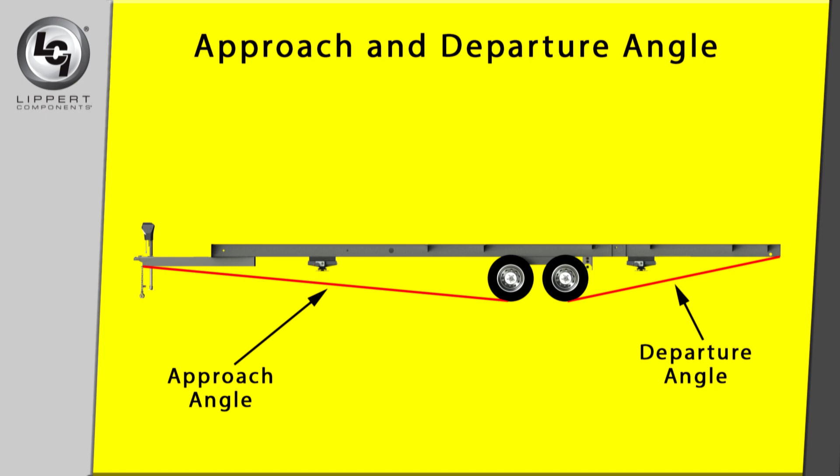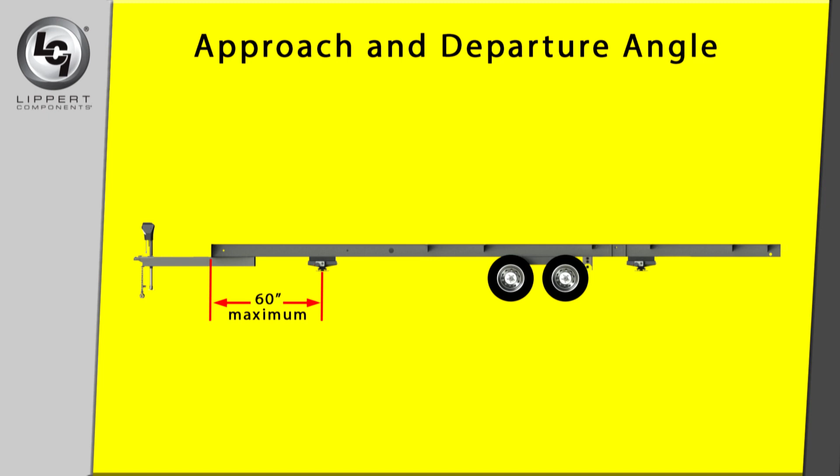Next, measure from the front of the frame and make a mark at 60 inches. This will be the maximum allowable distance for the location of the center of the C-jack footpad. The final location should be as close to the drawbar as possible, staying within the approach angle.

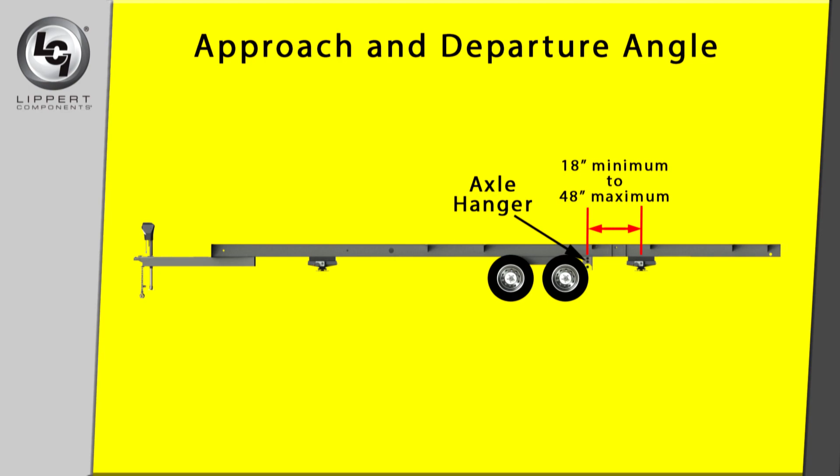Now, measure from the center of the rear axle hanger to the center of the rear C-jack footpad. The minimum allowable distance is 18 inches, and the maximum is 48 inches, while staying within the departure angle.

The trailer must be supported per manufacturer specifications before working underneath the trailer. Failure to do so may result in death or serious injury.

Please note that this bracing system is to be mounted across the frame, roadside to curbside, and the jacks are to be installed roadside to curbside as well.

Before beginning, ensure that all wires and hoses are clear from the path going from the curbside I-beam mounting bracket to the roadside I-beam bracket before starting the installation.

First, measure the I-beam mounting bracket and make a mark at the center. This will be the center for the C-jack footpad.

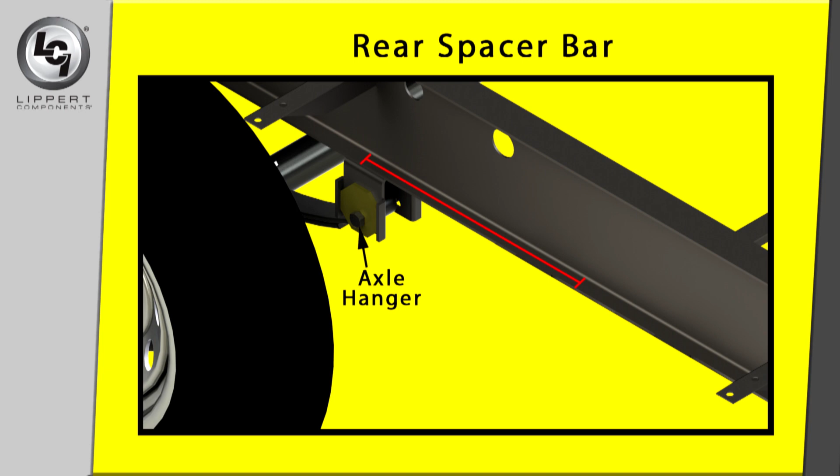Now measure from the center of the rear axle hanger and make a mark on the I-beam at 18 inches and at 48 inches. This is the minimum and maximum mounting distance.

Next, align the center of the I-beam mounting bracket between the 18-inch and 48-inch marks, staying within the departure angle. Make sure that the bracket lip is flush with the outside lip of the I-beam.

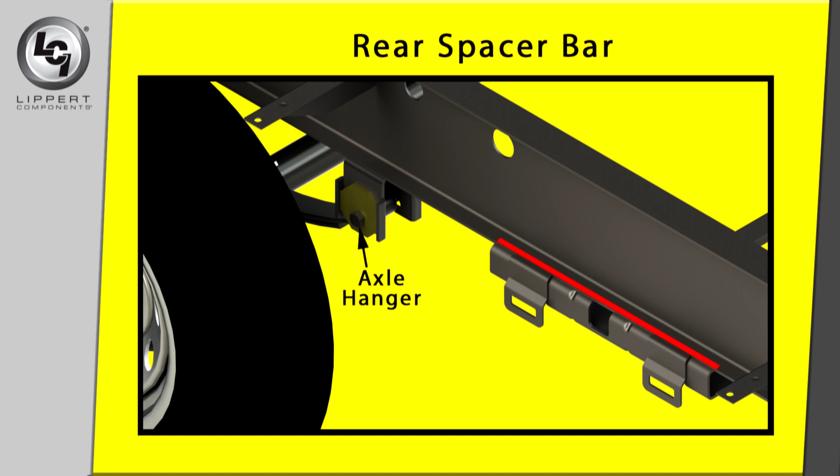You will need to use clamps to hold the I-beam mounting bracket to the frame rail. Then mark the 4 holes on the lip of the I-beam with the spaces provided on the bracket.

Use the notches on the I-beam mounting bracket to locate the center point. Please note, the center point is dependent on the width of the frame. The hole needs to be drilled between the 2 notches on the I-beam mounting bracket.

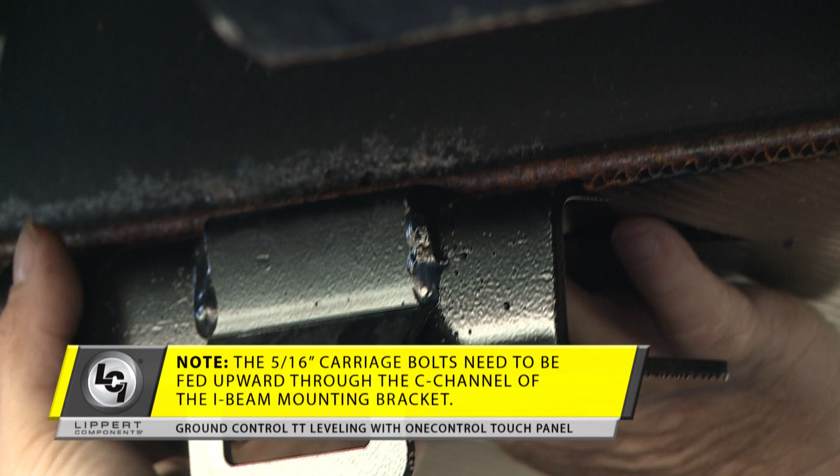Drill a hole into the frame as marked for all carriage bolts. Now, fasten the I-beam mounting bracket to the I-beam frame with 4 5/16 inch carriage bolts.

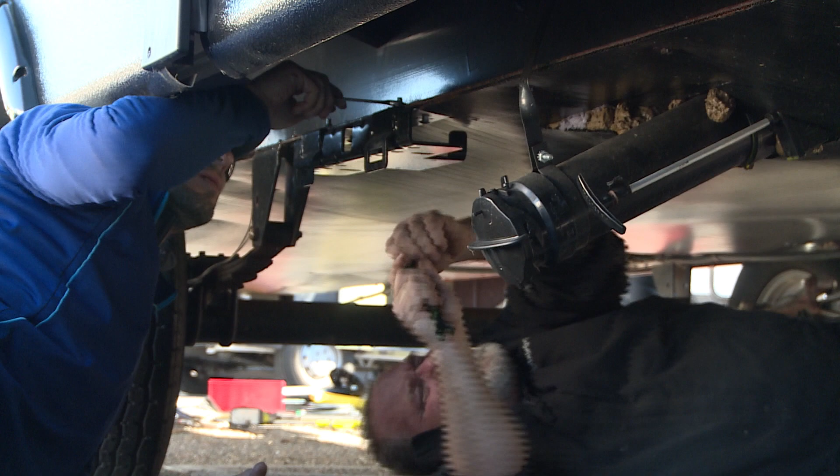Secure the carriage bolts with 5/16 inch serrated flange nuts and torque to 13 foot-pounds. Repeat these same steps on the opposite side of the frame.

Once both mounting brackets are in place in the rear of the trailer, align the tabs provided on the I-beam mounting bracket with the slotted holes on the spacer bracket.

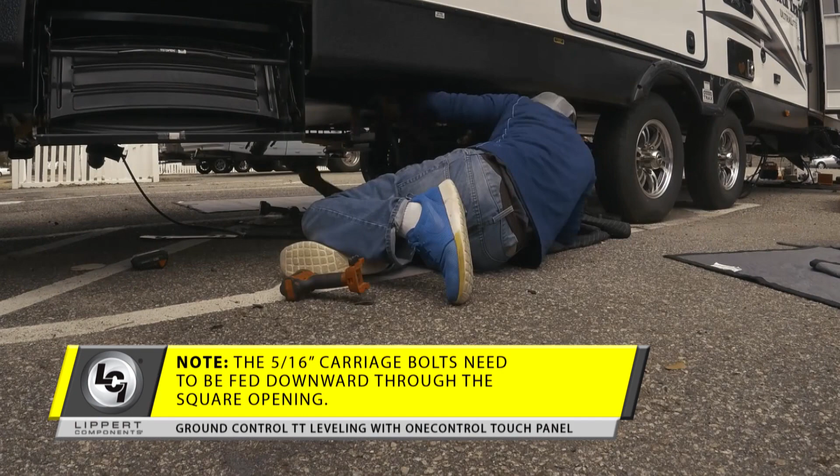Fasten the I-beam mounting bracket to the spacer bracket with 5/16 inch carriage bolts. Secure the carriage bolts with 5/16 inch serrated flange nuts and torque to 13 foot-pounds. Repeat these steps on the opposite side of the frame.

Before inserting the center tube, if there is no mark or hole for the center location on the center tube, measure and mark the center location.

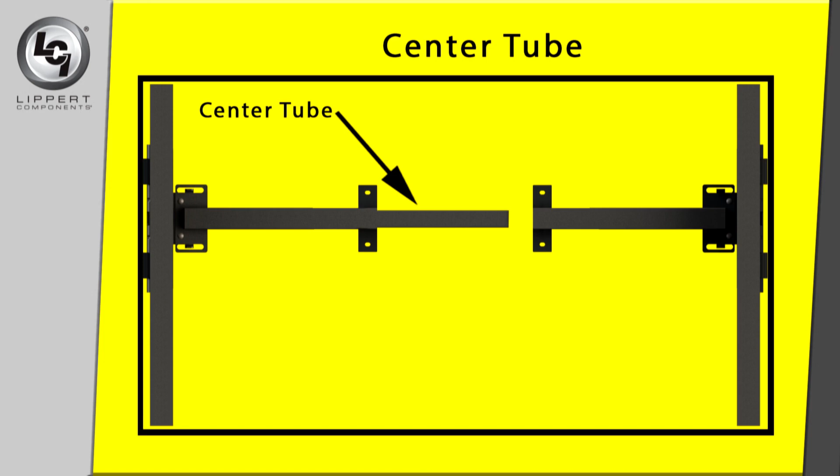Next, insert the center tube into one of the spacer brackets and slide it one way until the other end is clear to insert into the spacer brackets on the opposite side. Ensure that the center hole or mark is facing downward on the center tube.

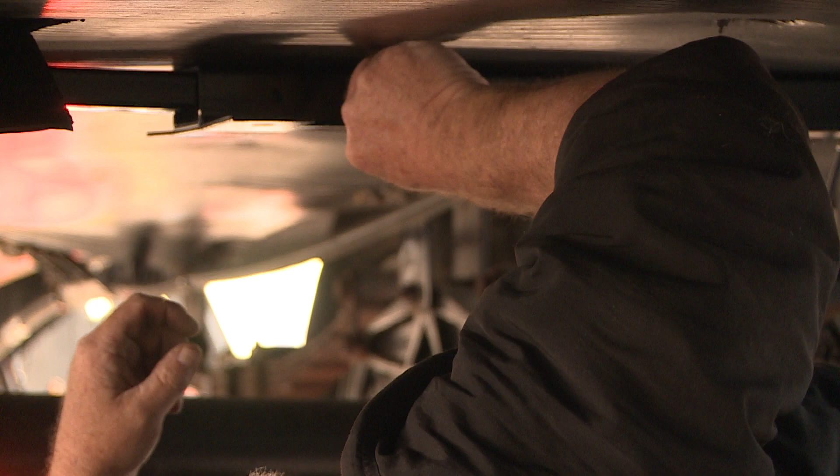Use the hole to center the tube between both ends of the I-beam mounting brackets. Using the 8 marked holes on the spacer brackets, mark holes to be drilled on the center tube.

Drill the 8 marked holes on the center tube with a 3/8 inch drill bit. If desired, you can remove the center tube from the spacer brackets before drilling.

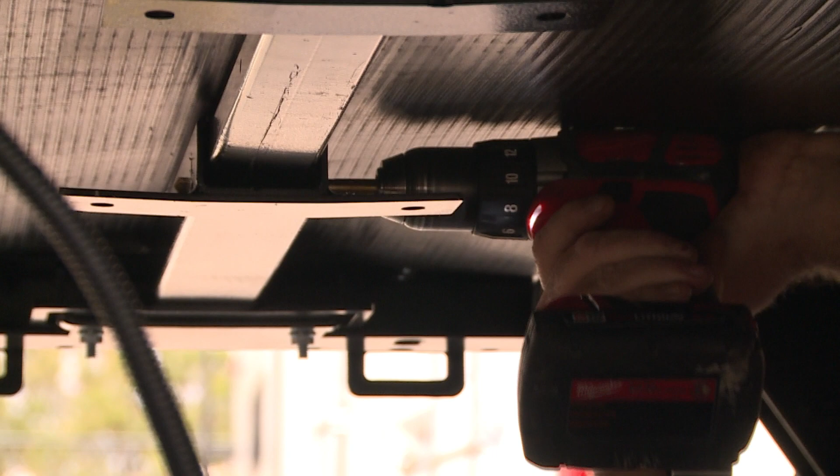Now insert 4 3/8 inch hex cap screw bolts with 3/8 inch washers through the spacer bracket and center tube. Secure them with a 3/8 inch flange nut. Torque each to 13 foot-pounds.

First, measure the I-beam mounting bracket and make a mark at the center. This will be the center of the C-jack footpad. Now measure from the front of the frame and make a mark at 60 inches. This will be the maximum allowable distance for the location of the center of the C-jack footpad.

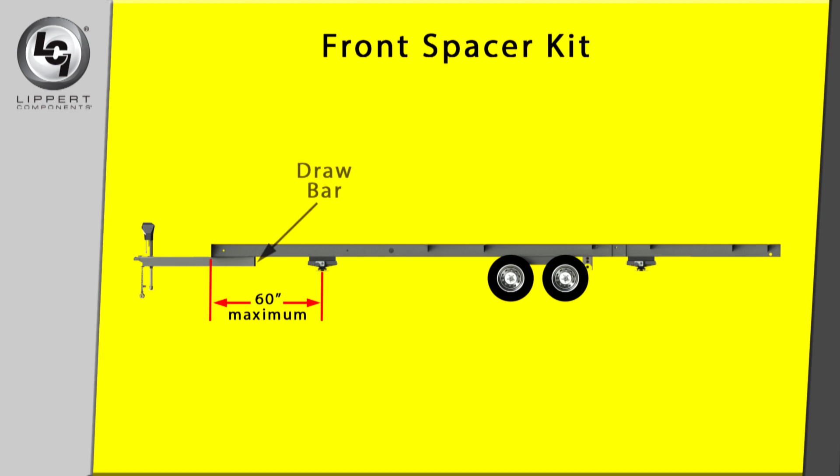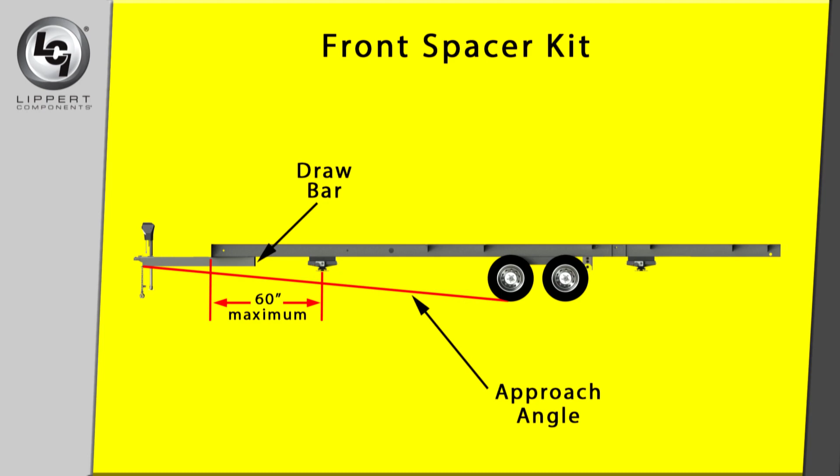The final location should be as close to the drawbar as possible, staying within the approach angle. Make sure that the bracket lip is flush with the outside lip of the I-beam. You will need to use clamps to hold the I-beam mounting bracket to the frame rail.

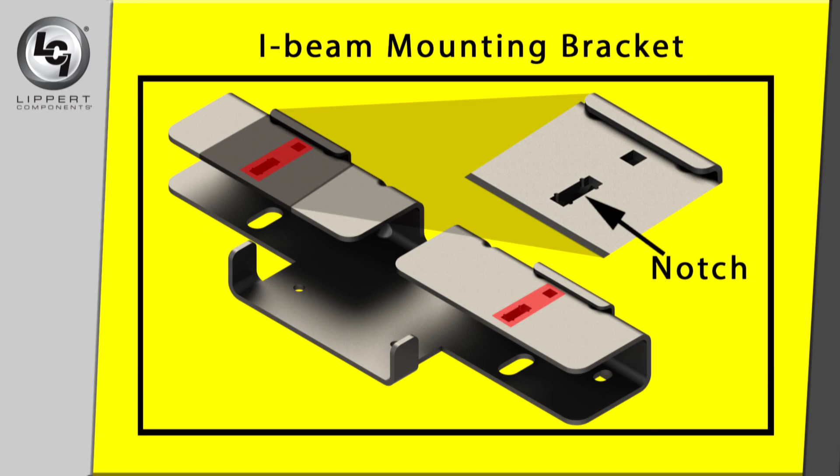Then mark the 4 holes on the lip of the I-beam with the spaces provided on the bracket. Use the notches on the I-beam mounting bracket to locate the center point. Please note, the center point is dependent on the width of the frame. The hole needs to be drilled between the 2 notches on the I-beam mounting bracket.

Drill a hole into the frame as marked for all carriage bolts. Now, fasten the I-beam mounting bracket to the I-beam frame with 4 5/16" carriage bolts. Secure the carriage bolts with 5/16" serrated flange nuts. Torque each to 13 foot-pounds.

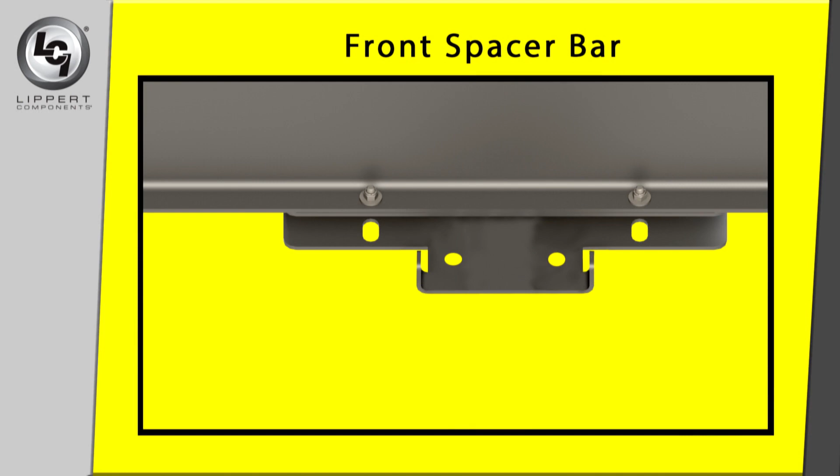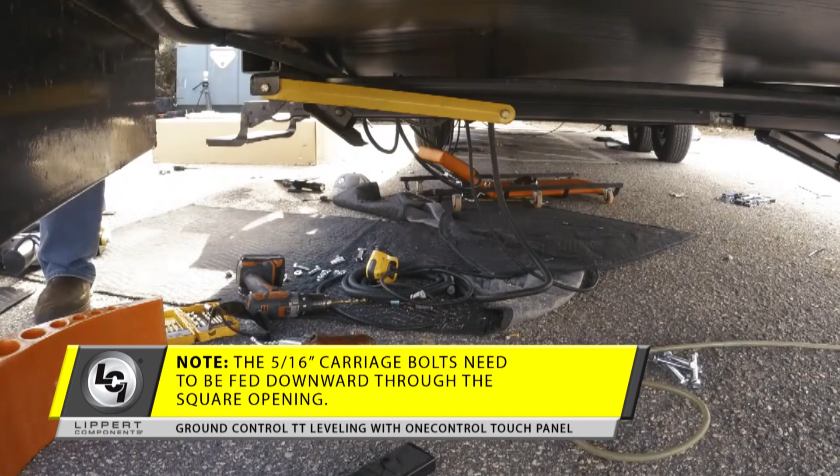Repeat these steps on the opposite side of the frame. Once both mounting brackets are in place, align the tabs provided on the I-beam mounting bracket with the slotted holes on the spacer bracket. Fasten the I-beam mounting bracket to the spacer bracket with 5/16" carriage bolts.

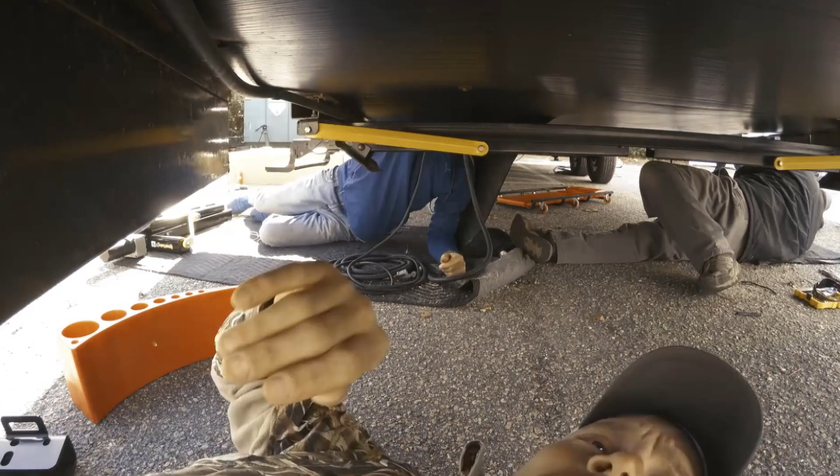Secure the carriage bolts with 5/16" serrated flange nuts. Torque each to 13 foot-pounds. Repeat these steps on the opposite side of the frame.

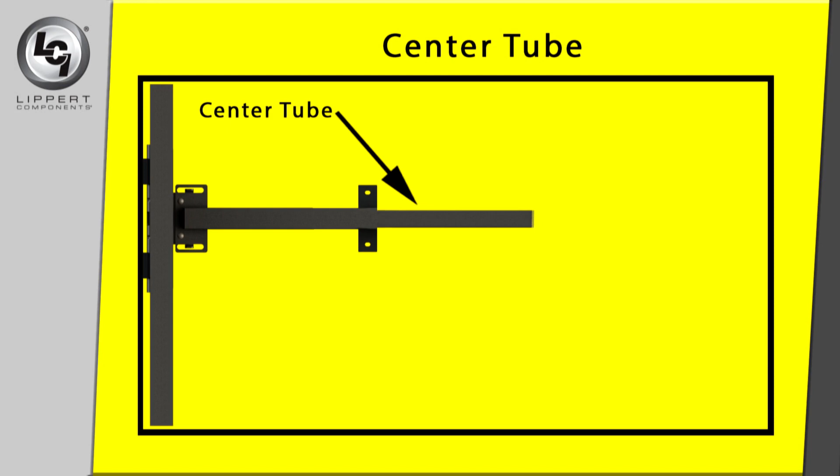Before inserting the center tube, if there is no mark or hole for the center location on the center tube, measure and mark the center location. Next, insert the center tube into one of the spacer brackets and slide one way until the other end is clear to insert into the spacer brackets on the opposite side. Ensure that the center hole or mark is facing downward on the center tube.

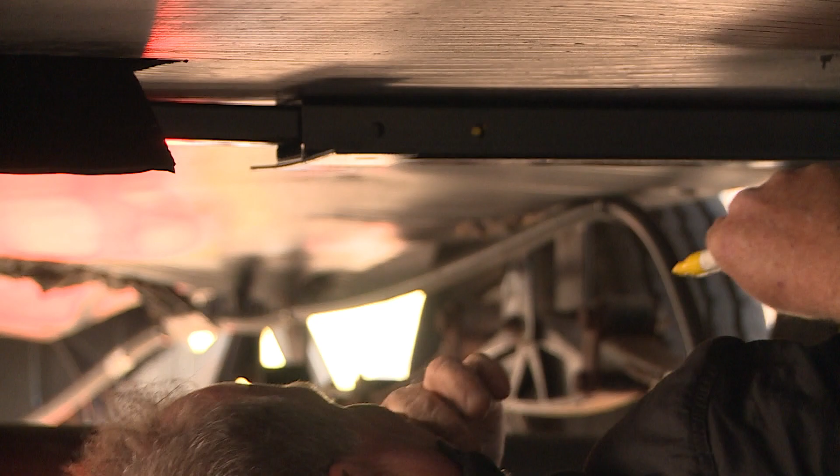Use the hole to center the tube between both ends of the I-beam mounting brackets. Using the 4 marked holes on the spacer brackets, mark holes to be drilled on the center tube. Drill the 4 marked holes on the center tube with a 3/8" drill bit. If desired, you can remove the center tube from the spacer brackets before drilling.

Now insert 4 3/8" hex cap screw bolts with 3/8" washers through the spacer bracket and center tube. Secure the bolts with a 3/8" flange nut. Torque each to 13 foot-pounds.

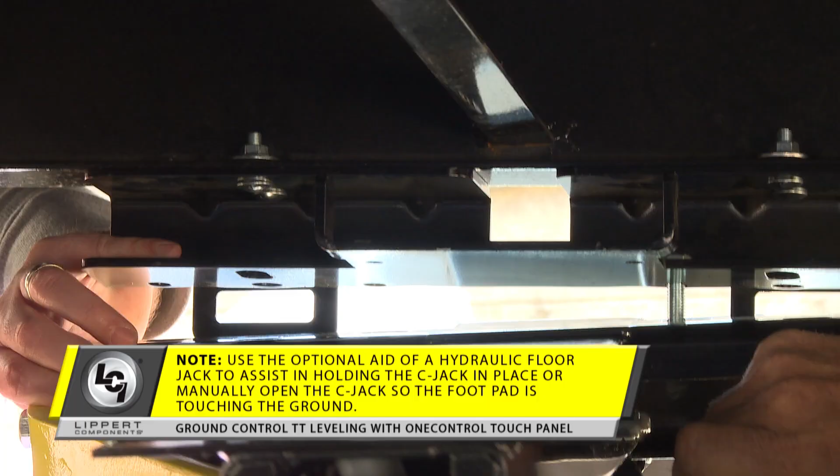For all 4 C-jack locations, align the C-jack mounting holes with the holes on the I-beam mounting bracket across the frame, roadside to curbside. Next, insert 6 3/8" flange bolts through each set of aligned I-beam mounting brackets, 4 at the I-beam end and 2 on the opposite end.

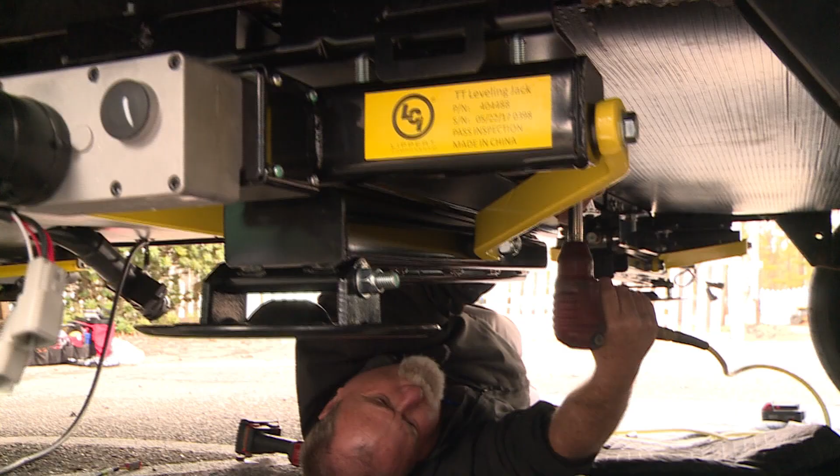Secure the bolts with a 3/8" flange nut. Torque each to 23 foot-pounds.

Now connect the 3-pin Deutsch connector to the TT jack motor wires and run the harness to the compartment where the controller will be mounted. LCI recommends that you zip tie the harnesses tight against the front jack motors to prevent damage to the harnesses.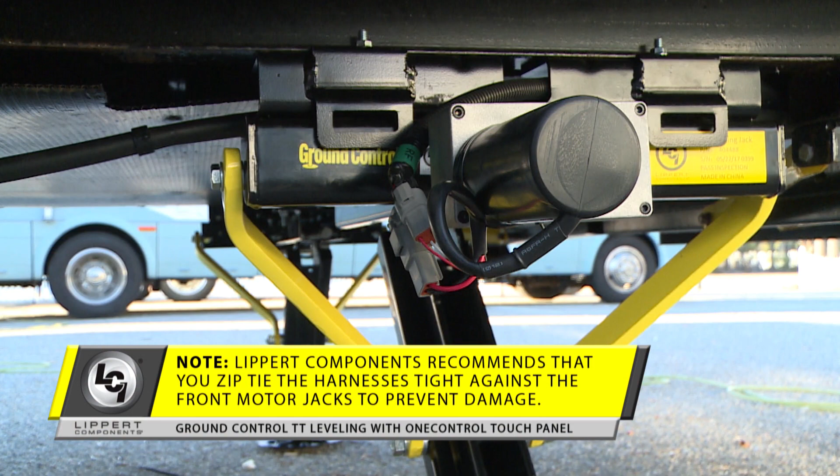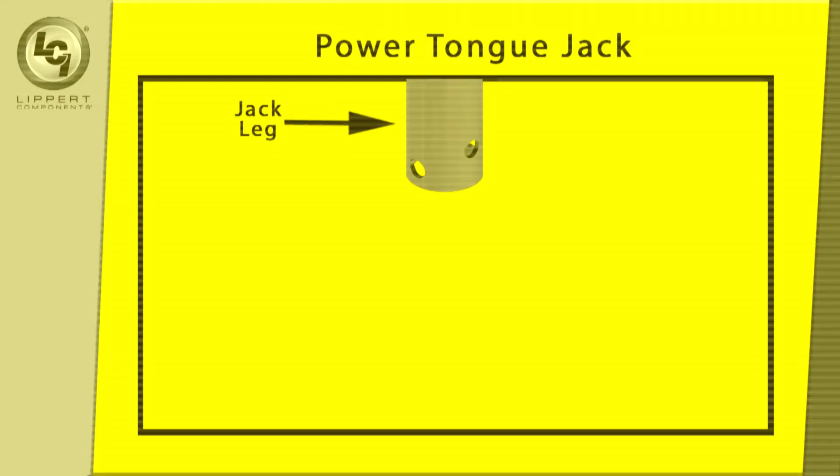Remove the footpad from the power tongue jack. Remove the hairpin cotter pin and clevis pin holding the footpad to the jack leg. Set the pins and footpad aside.

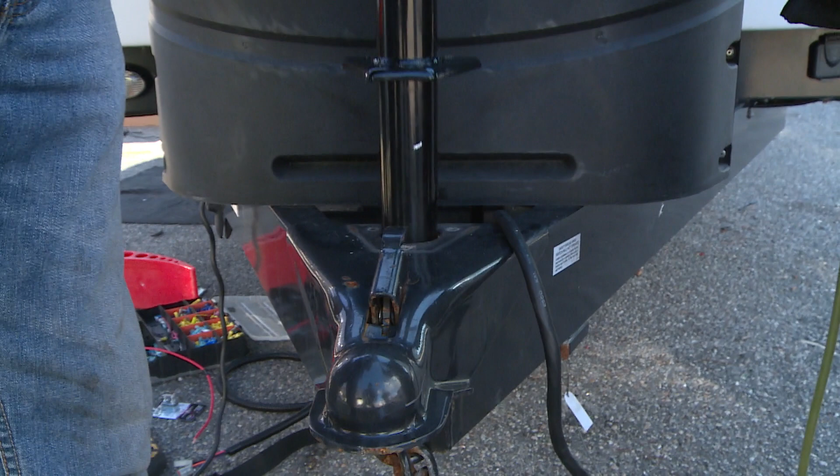With the trailer supported, remove the existing tongue jack. Ensure that the new power tongue jack is facing the front of the trailer. Carefully slide the jack leg through the hole in the coupler on the trailer A-frame.

Align the 3 holes in the power tongue jack mounting plate with the 3 holes in the coupler. Secure the power tongue jack to the coupler plate with the 3 provided bolts.

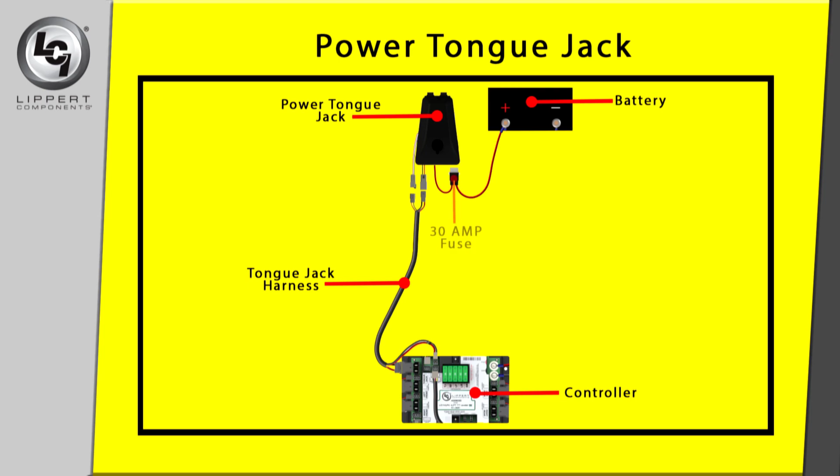Next, connect the 2-pin Deutsch connector to the power tongue jack wires and run the harness to the compartment where the controller will be mounted. Connect the power wire from the power tongue jack to the grounded 12-volt power supply on the trailer. The power tongue jack must be wired through a 30-amp fuse circuit supplied on the jack.

Reattach the footpad to the jack leg by sliding the footpad back over the bottom of the jack leg. Secure the clevis pin and hairpin cotter pin that you previously removed.

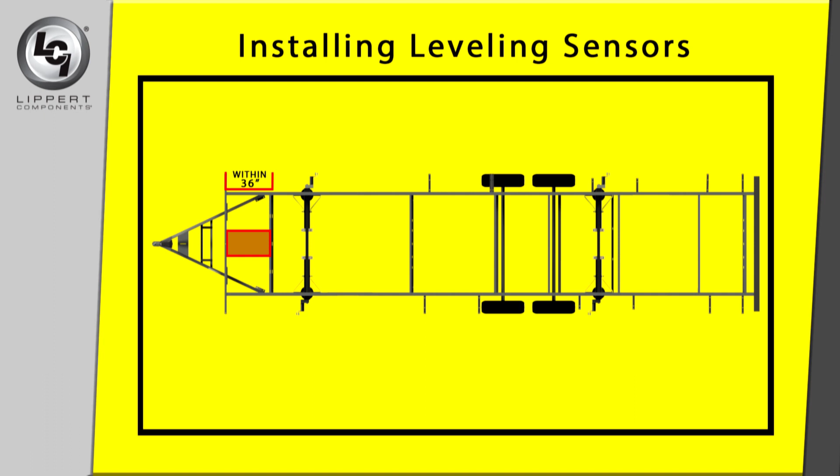The leveling sensors have a limited mounting area for proper performance. The front sensor must be within 36 inches from the front of the frame, as noted here as Section A.

Make sure that the front sensor is mounted in front of the front leveling jacks. The rear sensor must be in line with or behind the rear leveling jacks, as noted here as Section B.

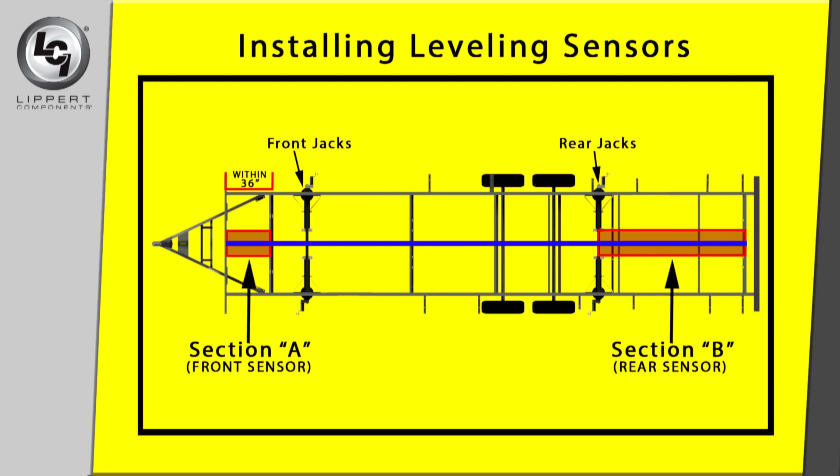Both front and rear sensors must be mounted in line with the center of the frame, signified by this blue line. Both of the leveling sensors must be oriented on the cross members with the arrows on the top of each sensor pointing in the correct direction.

If the frame is ground control travel trailer ready, it may be possible that the leveling sensor mounting plate may have already been pre-installed onto the frame.

Now, dry fit the mounting plate and the leveling sensor to the cross member. The pre-drilled holes closest to the rounded edges are for mounting the sensor to the plate. Mark on the plate where the sensor will set.

Make sure there is a space between the sensor and cross members so the wire harness is not pinched. Also, the wire harness must be pointed toward the front of the trailer. Orientation is imperative for the correct operation of the leveling system.

Attach the sensor to the mounting plate using two number 12 by 1 inch screws. Avoid over-tightening, which may crack the mounting sensor housing.

Next, attach the mounting plate and sensor assembly to the cross member using two number 12 by 1 inch screws. Make sure that the plate is centered side to side on the frame and that the sensor is oriented properly.

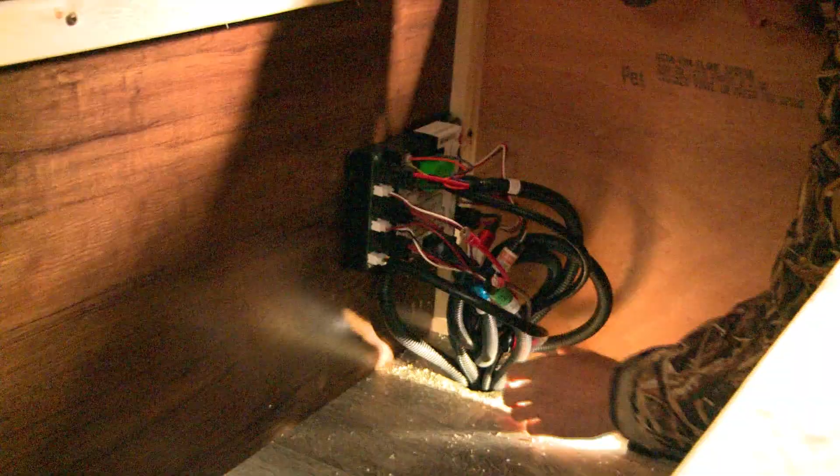Finally, connect the sensor harness to the 3-pin Deutsch connector on the sensor and run the harness through the frame and up to the compartment where the controller will be mounted.

Using 4 number 8 by 1 inch wood screws, attach the controller to the compartment wall or ceiling.

Attach the power and ground harnesses to the corresponding posts on the controller with the provided KEPS nuts and then connect the harnesses to the correct posts on the trailer battery. Connect all jack harnesses to the appropriate connectors on the controller.

Determine where to mount the OneControl touch panel. It can be mounted anywhere inside the trailer or trailer compartment. The mounting location must be watertight. The most common location is near the trailer entry door.

Dry fit the mounting bracket where the touch panel will be located. Cut a hole in the wall of the compartment using the inside opening of the bracket as a guide. Use the bracket to trace where the cutout should be located.

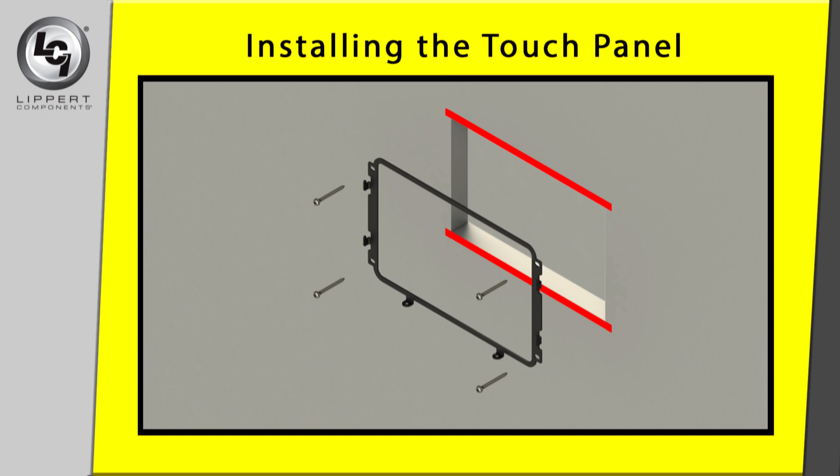The top and bottom horizontal cuts should be parallel to the floor of the trailer or trailer compartment. Secure the mounting bracket with provided 1/4 inch panhead Phillips sheet metal screws.

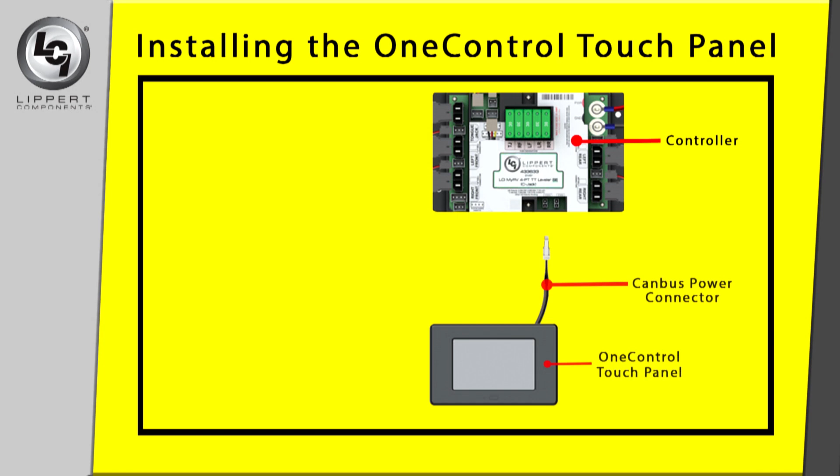Next, feed the CAN bus power connector through the bracket and run it to the compartment where the controller is mounted. Plug the CAN bus power connector to the appropriate connector on the controller. Please note, the system requires 2 terminating resistors, one at the controller and one on the back of the OneControl touch panel.

Now, insert the touch panel into the mounting bracket. Align the 4 slots on the back of the OneControl touch panel with the 4 tabs on the mounting bracket. Gently push the OneControl in and then slide down.

The mounting bracket has 2 screw mounting tabs on the bottom. Secure the touch panel into the screw mounting tabs using the 2 provided panhead Phillips sheet metal screws.

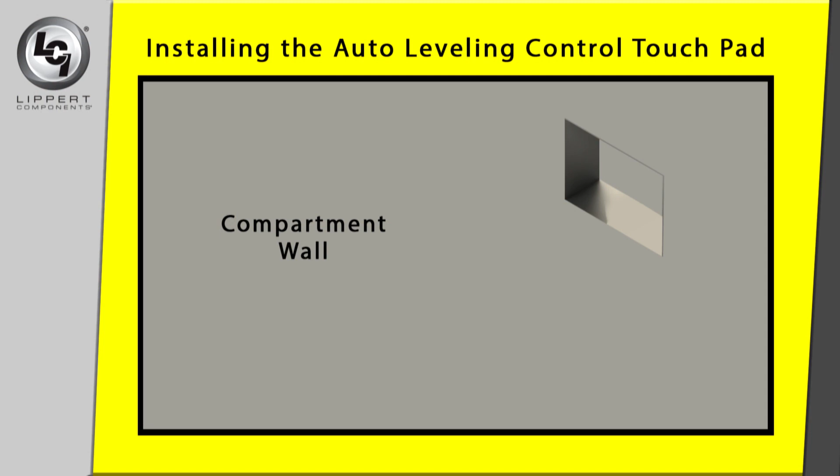First, determine where to mount the auto leveling control touchpad. The touchpad should be mounted on the exterior of the trailer so the operator will have a view of the coupler during operation. Cut a hole in the desired location 1 3/4 inch wide by 1 1/4 inch high.

Have a depth of 5/8 inch so the top and bottom horizontal cuts are parallel to the floor of the compartment or floor of the unit.

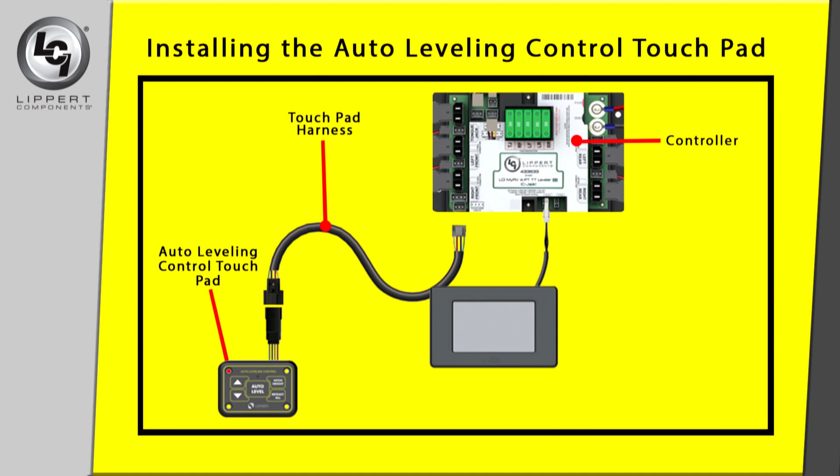Now, feed the touchpad harness through this hole and run it to the compartment where the controller is mounted. Plug the harness into the appropriate connector on the controller. Finally, attach the touchpad with 4 number 8 by 1 inch wood screws.